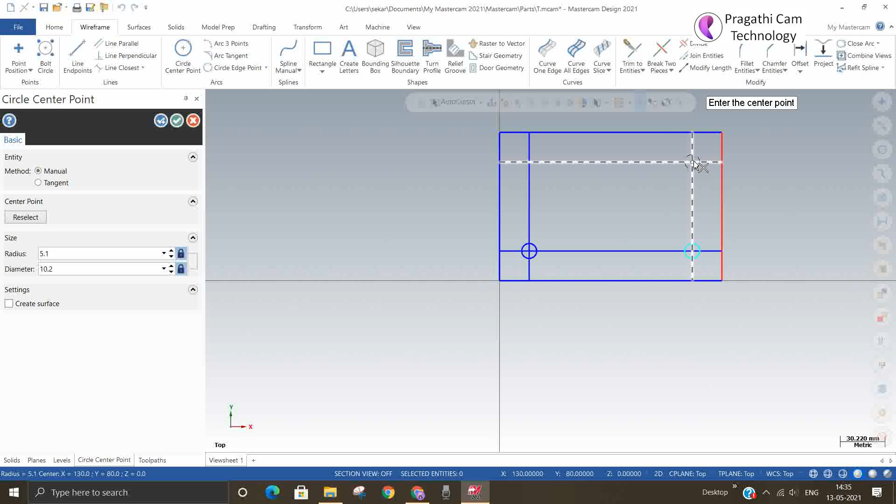Then I will put it in all the four intersections and the final intersection. Okay. Now these lines are guidelines and are not necessary. I just delete these lines.

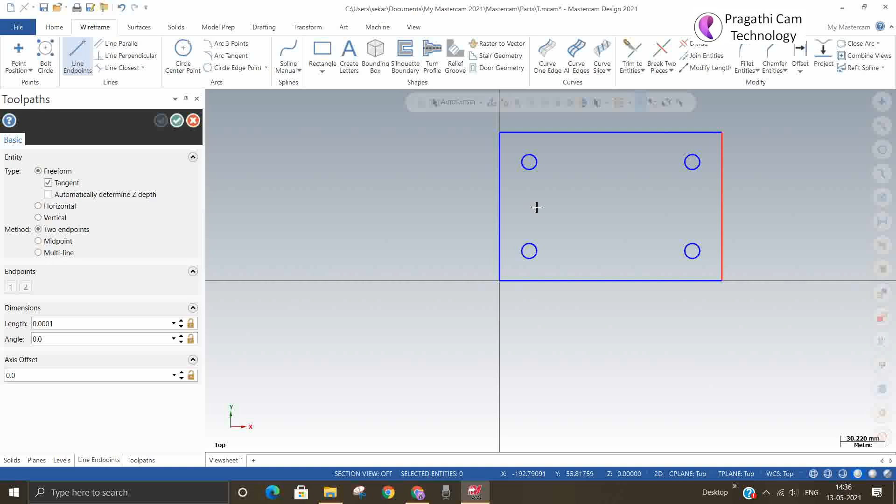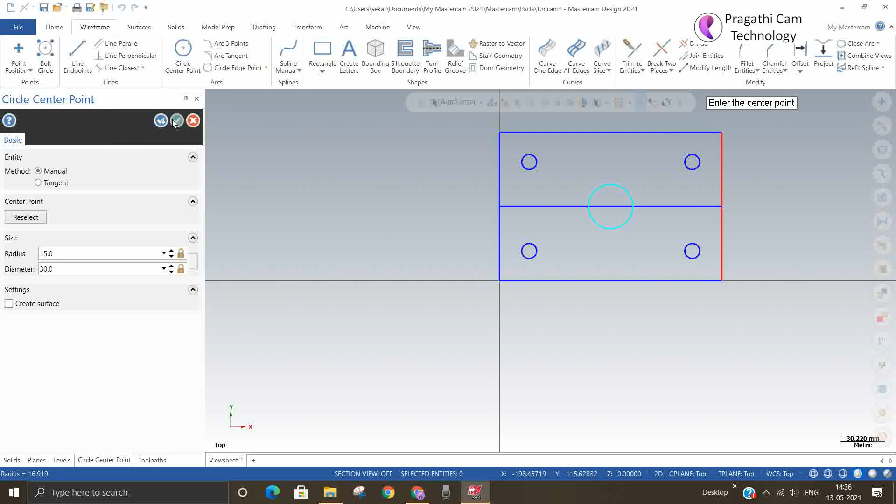So now we'll make one stock setup and machine selection. We are going to see boring also. It's better we'll put one hole at the center. So here we'll utilize the same plate for the boring also. So we'll make it 30 mm drill. Sorry, boring we are going to do. Okay, 30 mm. So this center line also I will delete it. Okay.

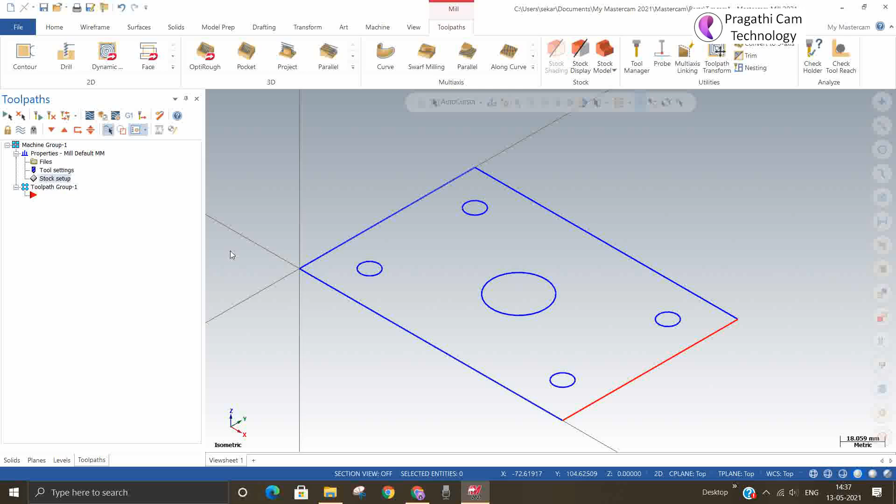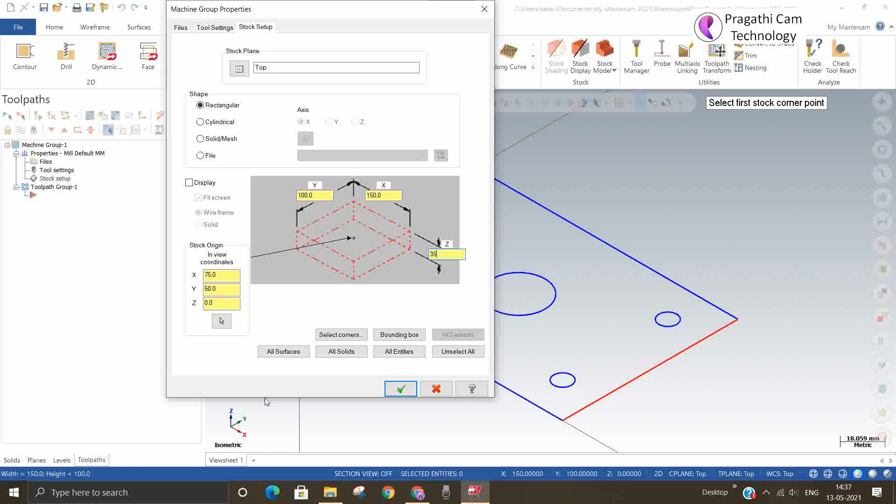Now we'll select the machine. I'll select default and the stock setup. Select from two corners. So other corner and thickness around 50 mm. Okay. Otherwise I will make it 35. So display I switch on. So you can see my stock is ready.

So now we are going to tapping. Okay. For that, what is the primary operation that needs to be done before tapping? That we will see. So the first one is the center drilling. I'll say mask on arc. Then select the window. So automatically the same size hole will select. Okay, accept.

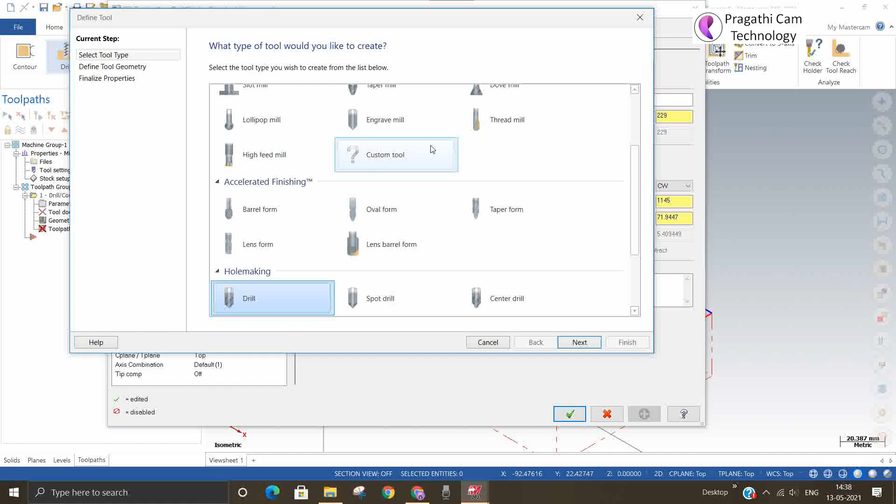So now you can go to tool, create a tool. You can access the tool from library if it is available. Otherwise, you can make it your own. So you can give what center drill is available with you, the same size. So we can accept the center drill.

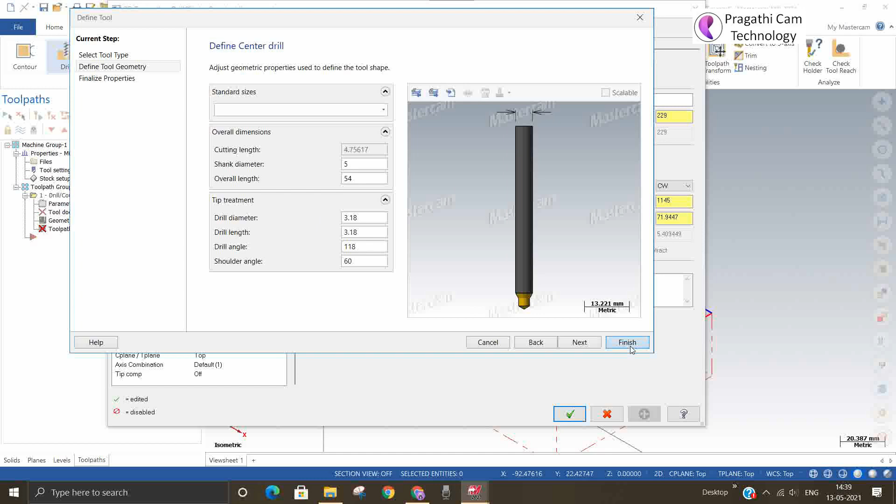The purpose of the center drill is to position the next coming drills. If you do not properly position the drill, there may be chances the drill may bend and break, or the drill may go in at an angle also. So to make the next coming drill at the exact center, for that we are doing the center drill. So I will make it 5 and say finish.

So now drill has come, then CS we can give 20, and feed rate is okay. Cut parameter, here I want only cut G81. Here linking parameter I will make it absolute, and here minus 2 I am keeping depth. Next I just switch on the coolant.

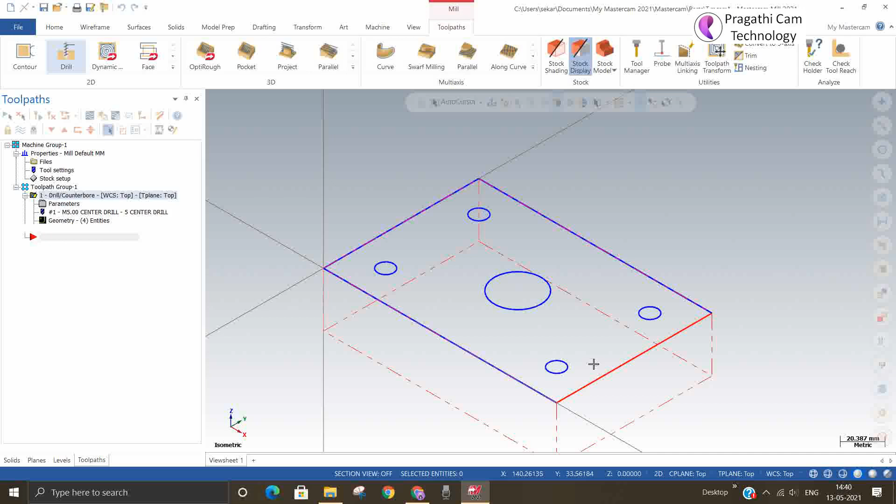So now you can see the solid verification, and let us see how this center drill happened. So now we just put a center drill on all 4 holes. For dia of 10.2, you need not go for pre-drilling. So you can directly take the 10.2 drill bit and you can drill it.

Just I am copying this and pasting it, and I'll change the drill. So I'll take new drill, filter none, and drill tools. Okay. So 10.2 drill I search. Yes, I got it, and I'll say HSS bit is available. I'll accept it. This tool number you can change it to 2.

Other parameters are okay. If you want, you can increase. Make it spindle speed 1000. Here I will make it peck drilling, and first peck 4. Okay, remaining depth I need to.

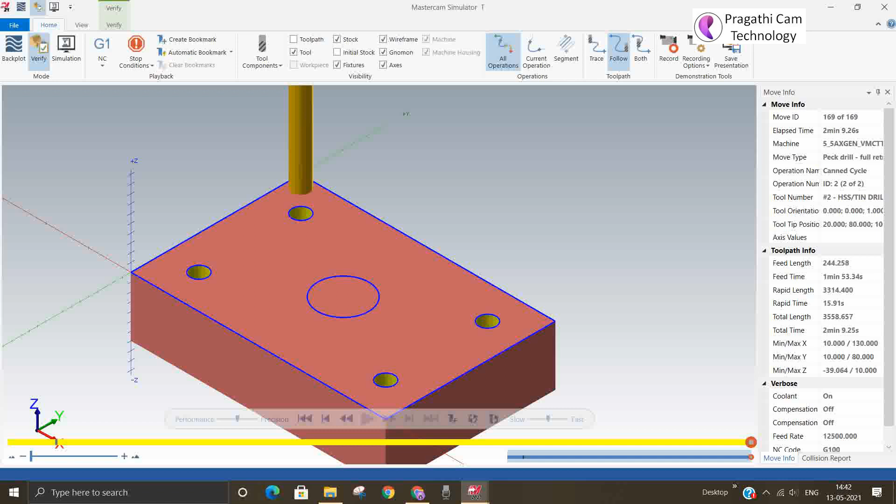So now that drilling is finished. So first that's the center bit, then the drilling is ready. Can we do tapping directly? But you should not do the direct tapping here, because for receiving the tap, the hole should have the chamfer. So that makes your tap entry in the correct direction and correct position. So there should be a chamfer at the top of the hole. Without chamfer, it's a little difficult to make the tap entry. Okay, so it is always needed to have a chamfer.

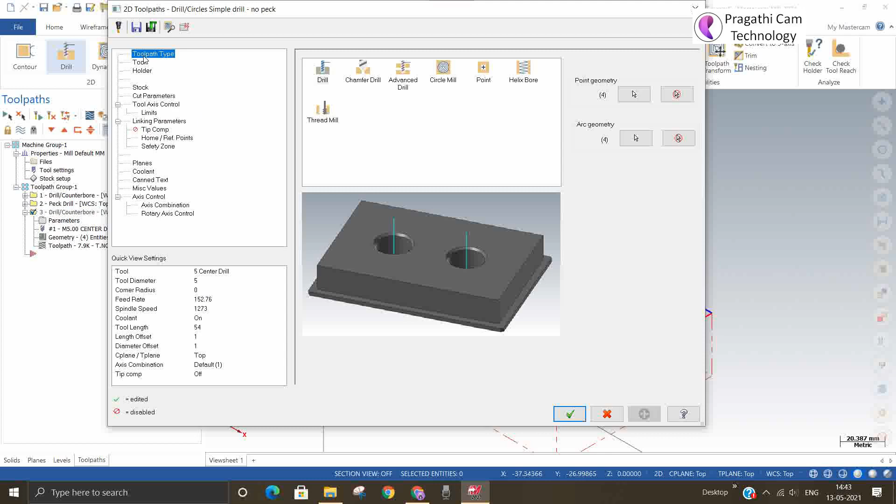I'll just copy the first operation and paste it. So now we'll take a bigger tool than the 10.2 tool. So select tool from library, filter, none, and I'll select drill tool. Okay. So 15 drill I will take. Okay. So this is tool number 3. So remaining things are okay. So let it be in the G81, Z minus 2. Okay.

So now you select all and verify. Oh, something went wrong. Maybe the edge condition of the drill was flat. Okay, so we'll recheck the shape of the tool. So it means that your drill selection was wrong. It's the wrong tool. I'll delete this. So directly I'll delete this tool. Okay, I'll add another tool. So I should have seen it properly. I missed it. Okay.

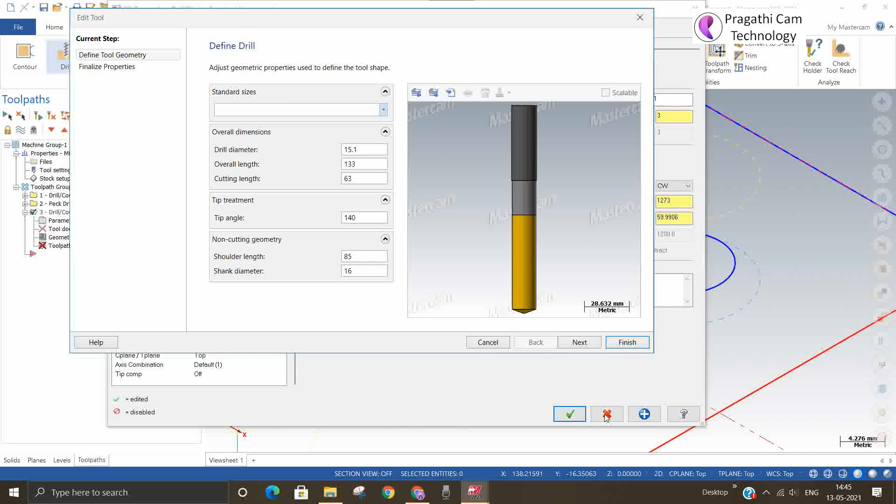So 15.1 is a solid carbide tool. I will select that tool. If you want, you can check the tip condition before going further, so no need to come back and recheck this. Okay, this is okay. So regenerate. Select all, verify. So if you want to do any tapping, minimum 3 operations you should do.

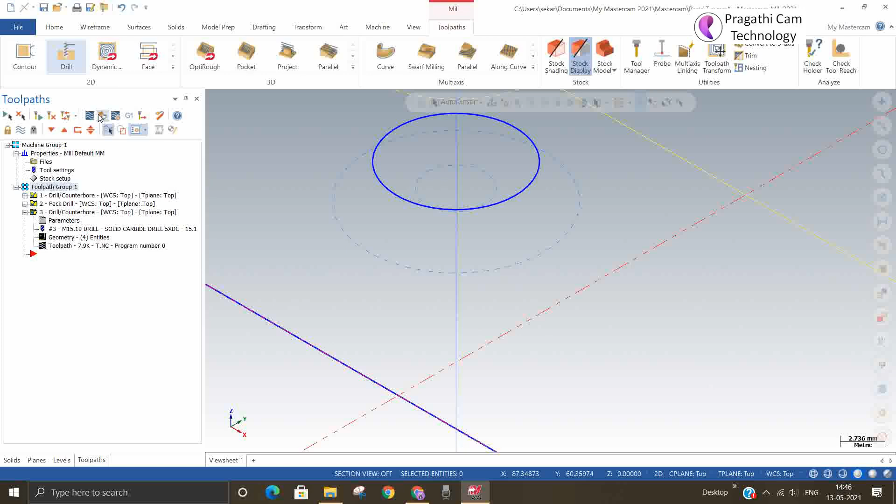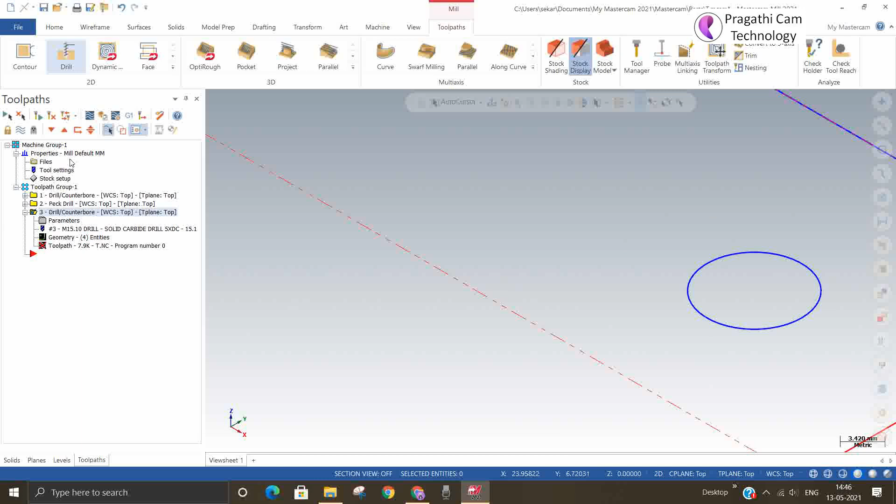So I think I need to have a little more chamfer depth. So I'll make it -3. Okay. It's a little bigger. Okay. It's better. We'll still reduce. So we'll make it -2.5. Okay. Regenerate. So these primary operations, all pre-drilling and chamfering, everything is ready now.

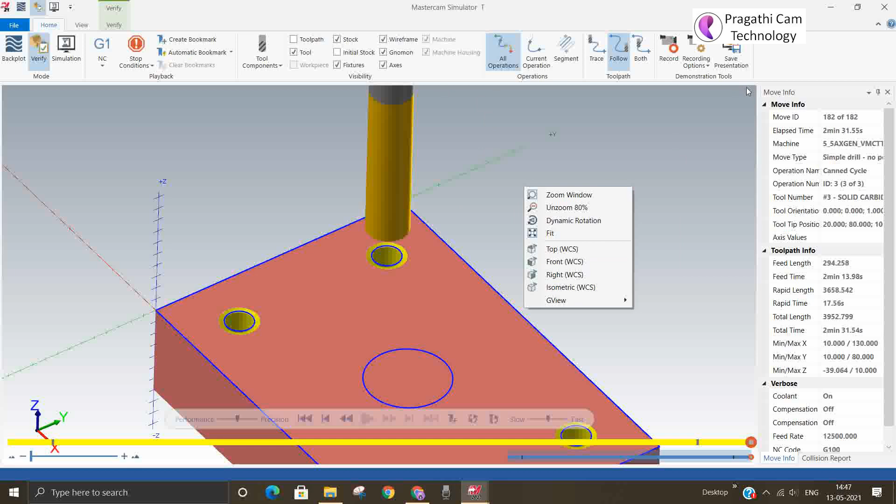The purpose of the chamfer is to receive the tap. Okay. So for any threading, any tapping, you should do all these three things: center drill, thread hole diameter drilling, then chamfering. Then only you can go for the tapping.

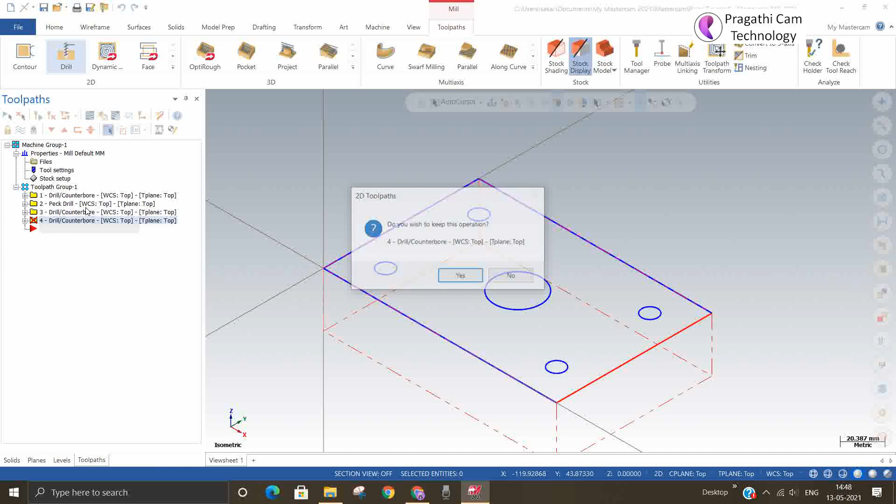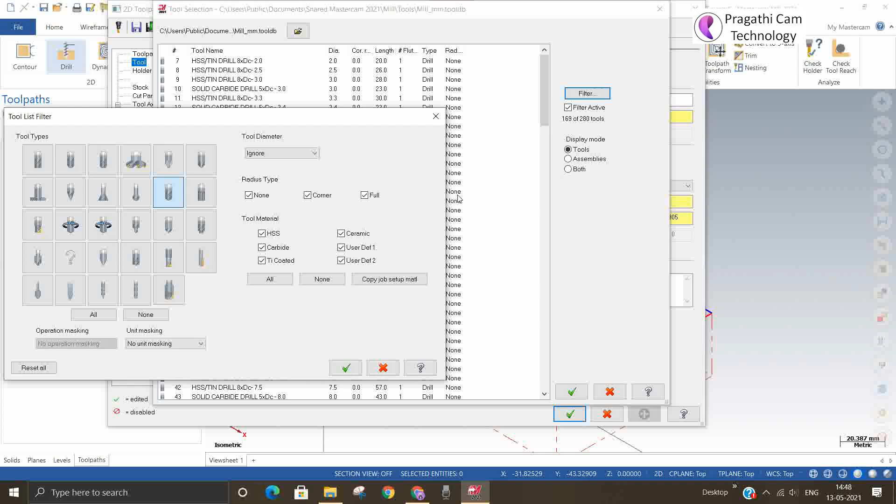Now we'll go to the toolbar. You can see last. So that option is not there, I think. Okay, we'll make it again. Mask on arc. Or I can select directly also, no problem. I need to check it. Okay. So I selected all 4 holes. Tool. Library I will go. I need a right hand tap. RH. Okay, this is the right hand.

So in almost all thread applications the right hand tap is commonly used, but sometimes in some applications the left hand thread is also used. It depends on the situation. For all general applications, all are right hand threads. So I have taken right hand thread. So now we'll see the right hand.

So we are, sorry. I think filtration is not properly done. Okay, I'll go again. Tool from library, filter, none. Yeah, I think that also on. So okay. Now M12, 1.75 is the pitch. Okay, this is my tap. Once you take it, automatically it will allow you to change your CS. So you can see that the feed per tooth automatically comes 1.75. Your feed per tooth is nothing but your pitch. Okay, so the feed rate goes around 280. Okay, spindle speed is okay. It's a minimum. So tool number you can make it 4.

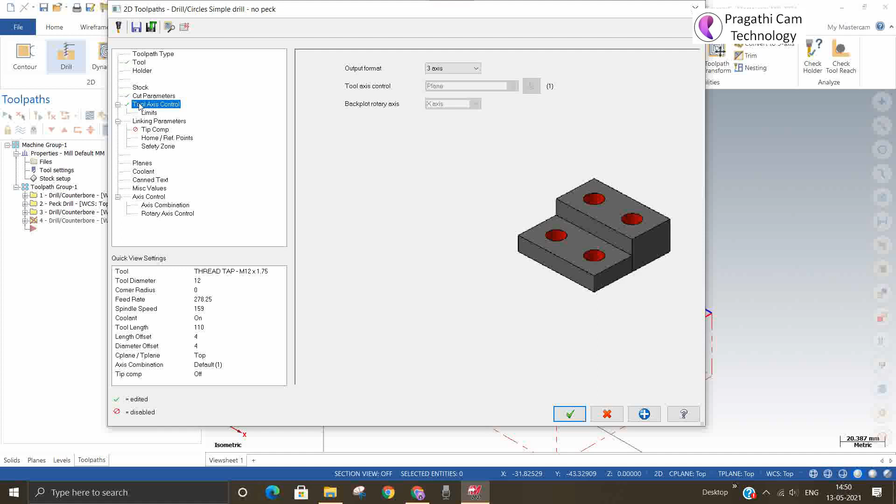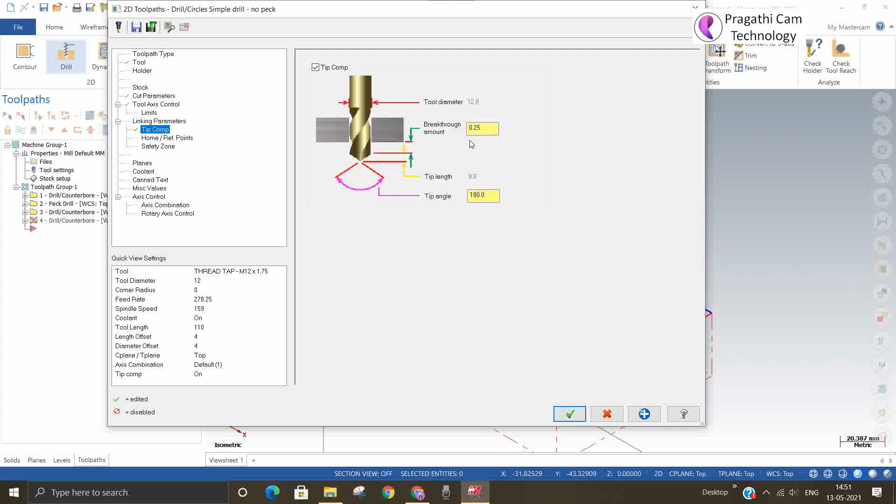Remaining thing, you can give the depth. So I will give minus 37. So I've given 2 mm more. The reason is, in the tap the starting portion of the thread is not fully formed. That's the reason you need to go a little down. Okay. So here also you can modify. You can switch on the coolant. Okay. So now you have done the threading also.

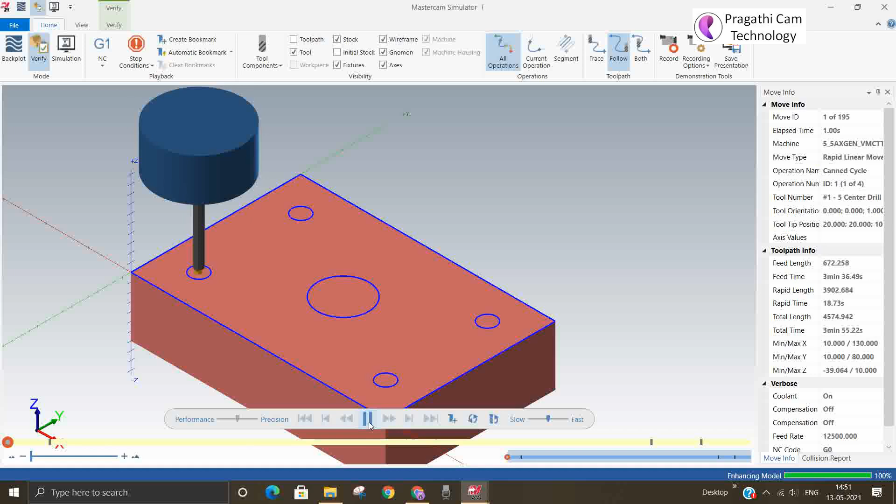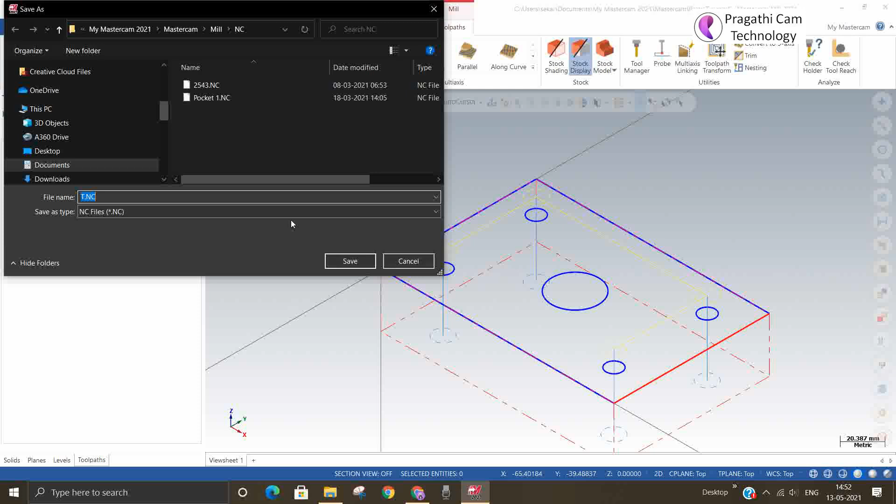So just to run it, the tap will not be visible here, but you can check it from the code. Okay. So I will select only the tap. I will generate a G code. Okay. I will give some name. Okay. So now you can see that G84 is the tapping cycle. It may differ for different machines or different controllers, but for generic Fanuc it is G84.

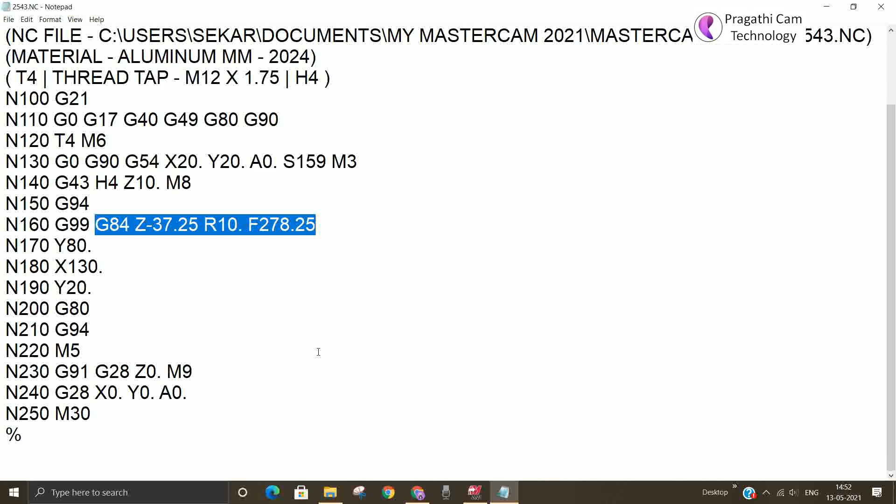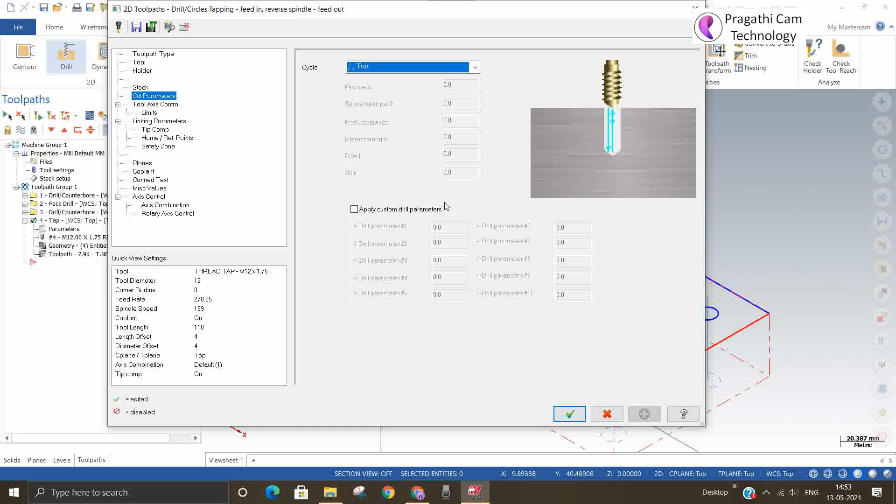Okay, this is all about the tapping cycle. There is not much you need to modify here. Only you select a tap here, and you need to select the right tap in the tool. That's all. So okay, this is all about the tap. So next, what remaining toolpath is available there, that we will see. I just deleted the thing.

So now we'll go for the boring. For boring also you need to do the centering and pre-drilling, because boring is a finishing operation. You need to get the exact size. So based on that, you need to make the pre-holes. Okay. So first we will center drill and do the pre-hole. Then we will go for the boring. So I will select the point and I select center drill.

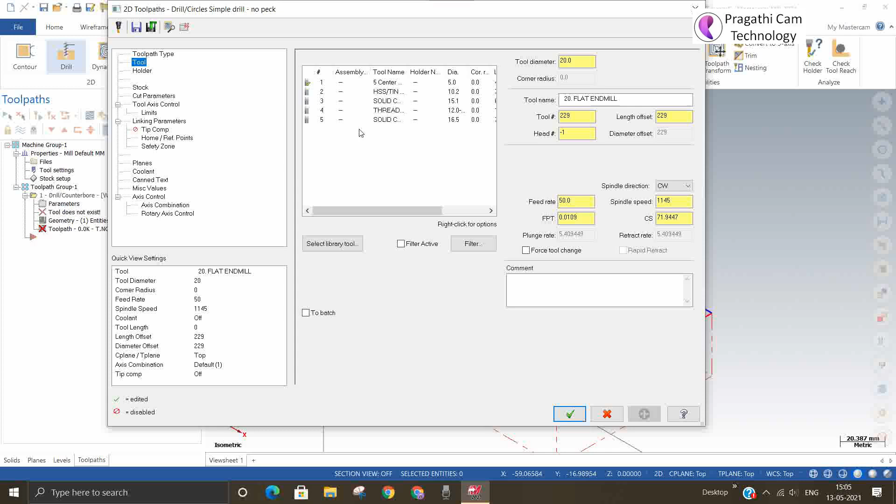Okay. Linking parameter I will give absolute, minus 2.

So now center bit we're done. Next we will copy this and paste it.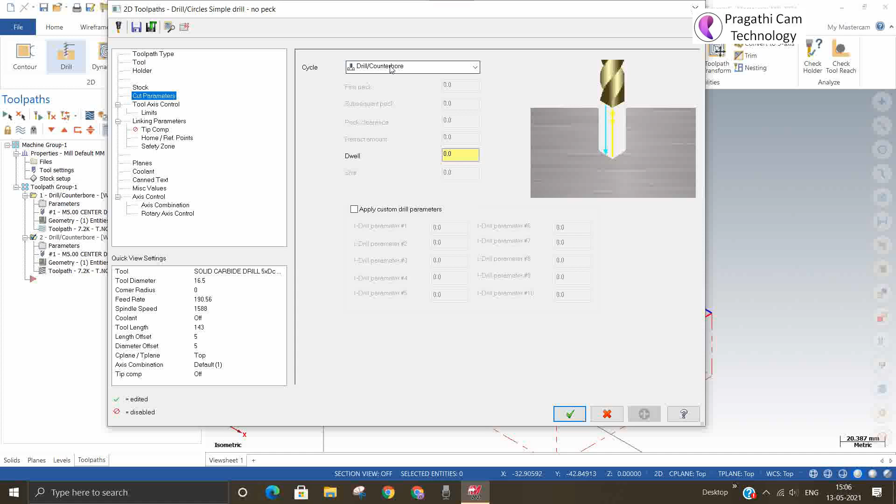Here you can change the tool. So next size I select. Here cutting parameter you change. First peck 4 mm, and in parameter depth you make it minus 35.

So here tip compensation switch on, and you can switch on the coolant. So you can regenerate it. So this drilling is over.

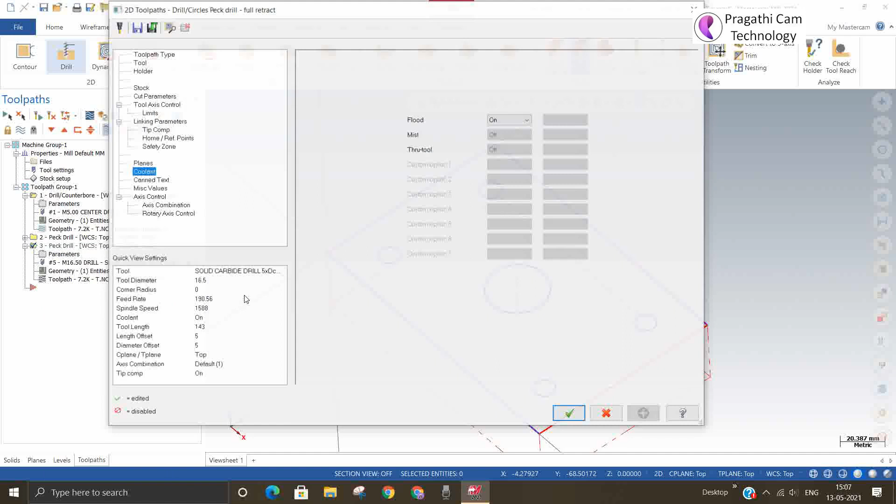So for 30 we have put only 16. So next pre-drill we can use. We'll check it.

You cannot keep more stock for boring. Boring is a finishing operation. How much less amount of material you keep, that is the best.

So now we'll select the tool, 20, 29. We are keeping 0.5 mm per side. So the tool number 6. Remaining I am not changing anything. I'll accept.

Boring is the final finishing operation. So for the 30 drill hole, we put a 29 mm drill. So what is left out is 0.5 mm material per side.

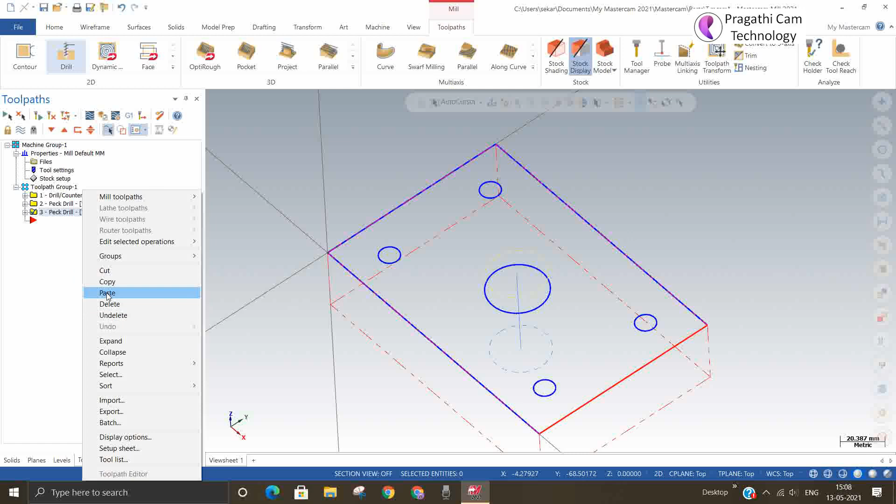You can ask me, sir, why not directly put a 30 dia tool? Why do we need boring? The reason is in drilling you cannot get the accuracy, because the drill doesn't have the capability to make the exact size. That's the reason we go for the boring operation.

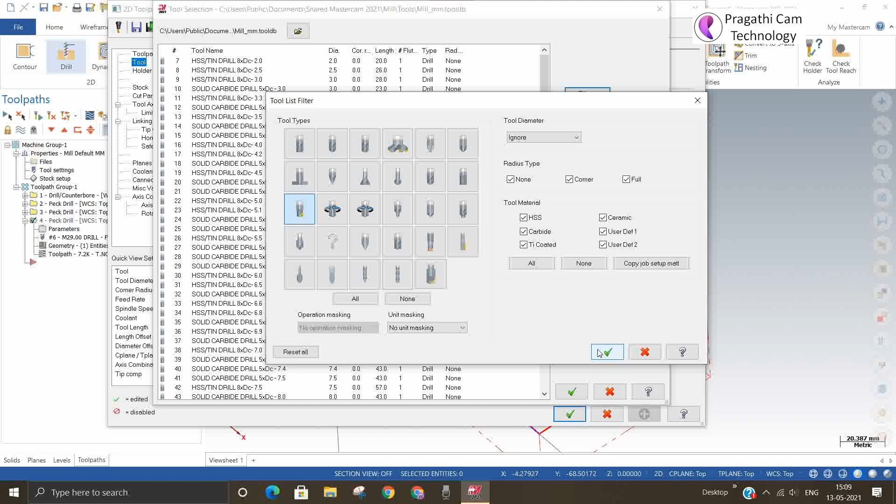So we'll go to boring now and select the boring bar. Okay, this is the boring bar. Let me see if it's available in the library. No, it is not available. I will right click and create a new tool.

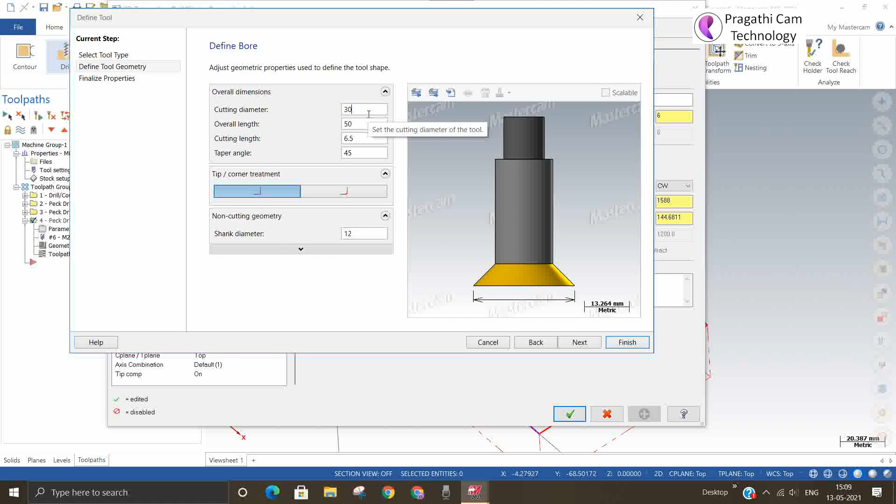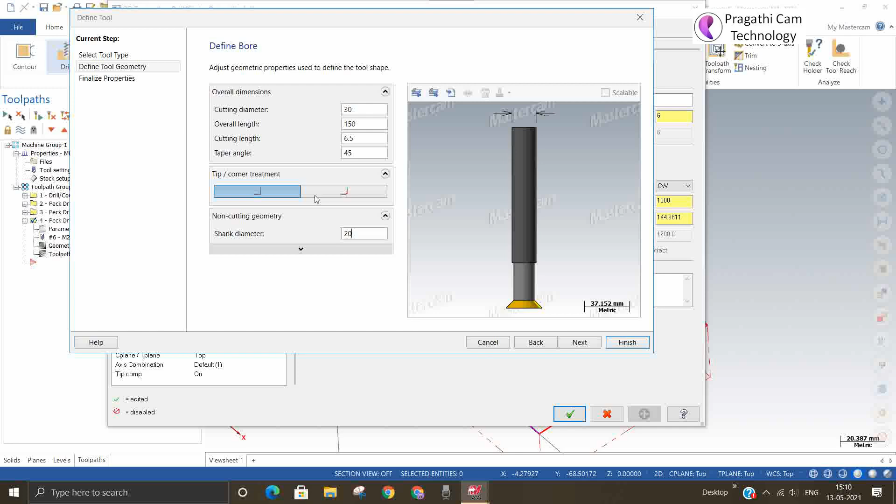So we need a boring bar. So what is our diameter? 30. Okay, you can modify the remaining parameters. Shank dia we can change. Okay, we'll finish. So now we got the 30 boring bar.

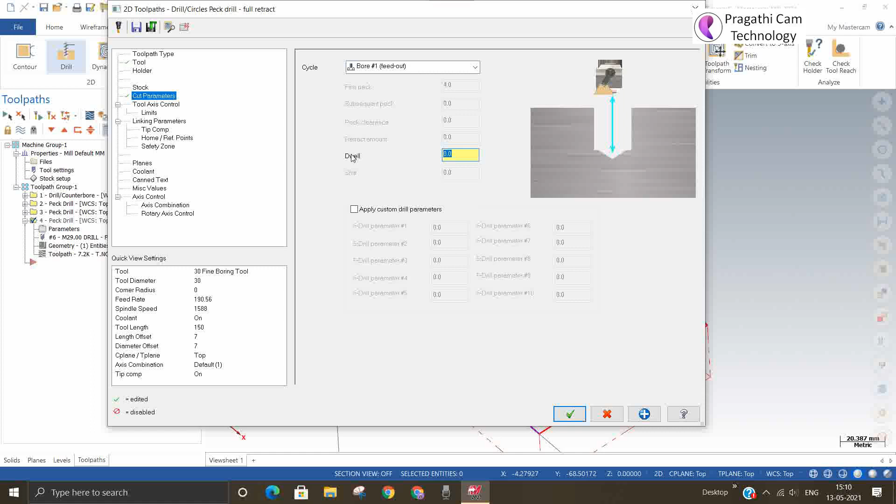Now we can go here and change it to the boring bar. Boring one we are selecting now. If you want to dwell, you can give it. I don't want now. Next I will go to linking parameter.

Remaining thing I accepted and I will say okay. So you just regenerate. So now boring is finished.

So just check it from the front view. So still we can go a little further. I will make it minus 37. So like this I will change it in all other operations also, to 37, 37.

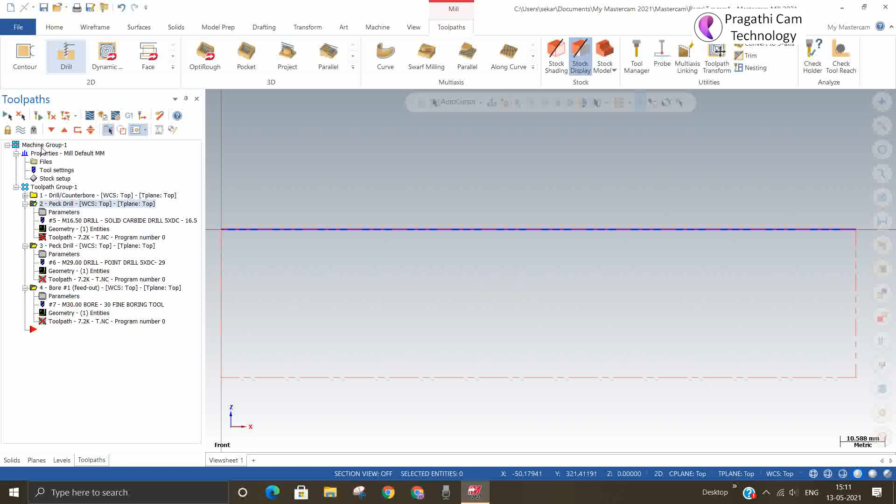It's important that you check whether it is properly reaching or not. So now it's okay. Now we can select all and verify this. This is the boring.

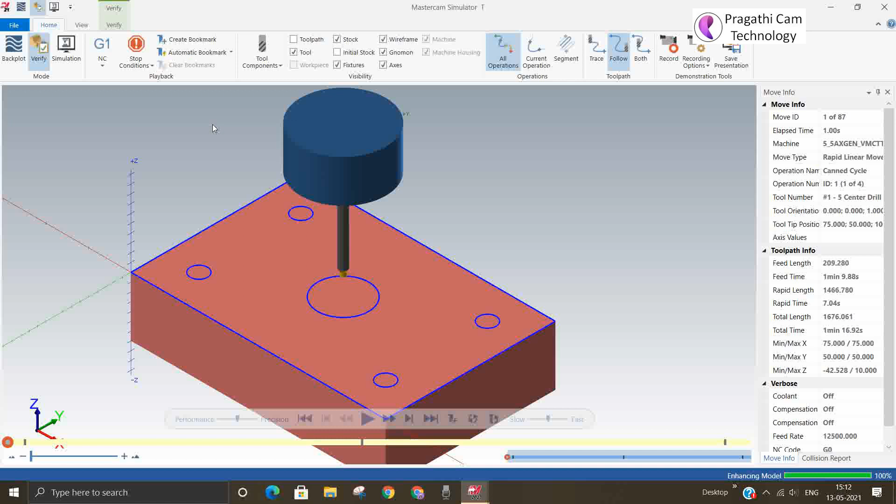Okay, so we can run it now. Run it now. So now we have done the boring. So just we will generate G code and see.

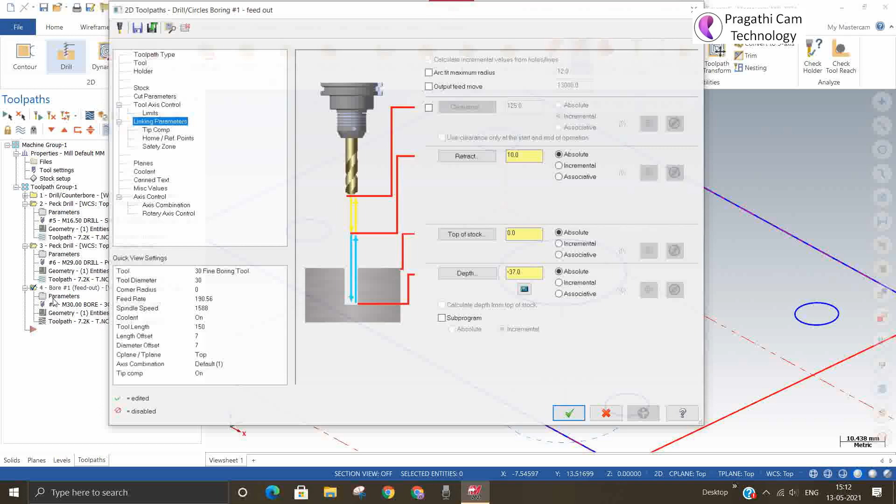It is the boring cycle G85. Now for boring there are some more methods. We see this is a bore one, that is the feed out option.

Next is the stop spindle option. We just selected the second option, regenerated, and generated the G code. So that the only thing is you will get a different cycle here. Oh okay, so here it is G86. Previously it was G85. I think so, okay, let us check it again.

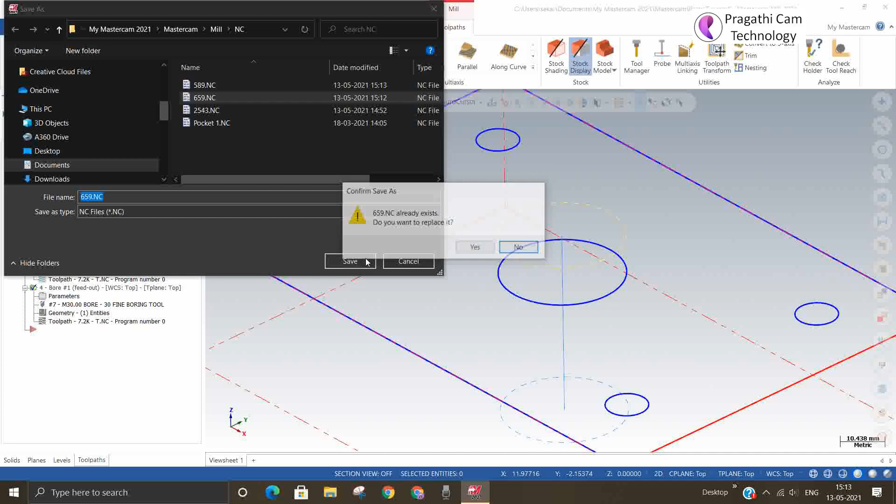So I kept the first one only. Okay, let us check whether it's G85 only. Okay, yes, it's G85 here. So in the next cycle it is G86 that is coming.

So next we will say fine boring. What is the code? So now we'll generate G code for fine boring. So this is G76. So it gives the code G76 for fine boring.

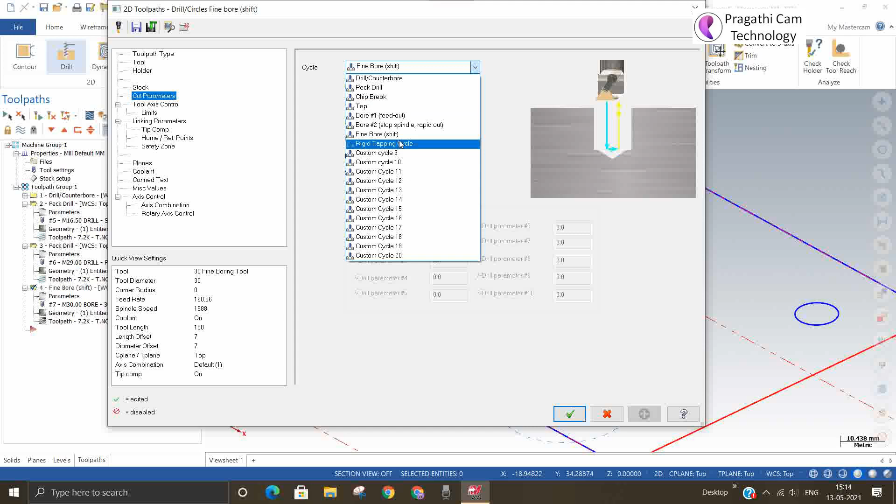So there is one more called the rigid tapping cycle. Already we have seen the tapping, so here the procedure will be the same. Now we need to understand what the code is for rigid tapping. We are not changing any tap or other thing, just going to understand what code is coming. For that reason we will change it and regenerate.

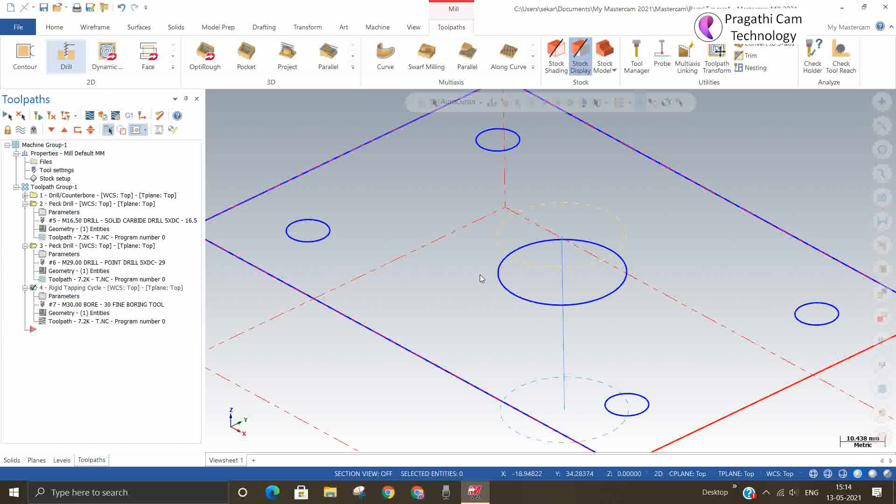It is G84 that is coming. So this is the rigid tapping cycle.

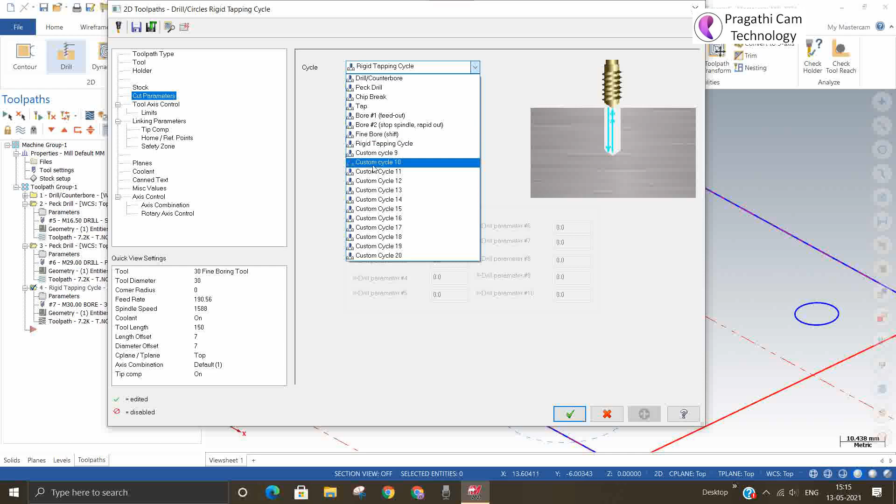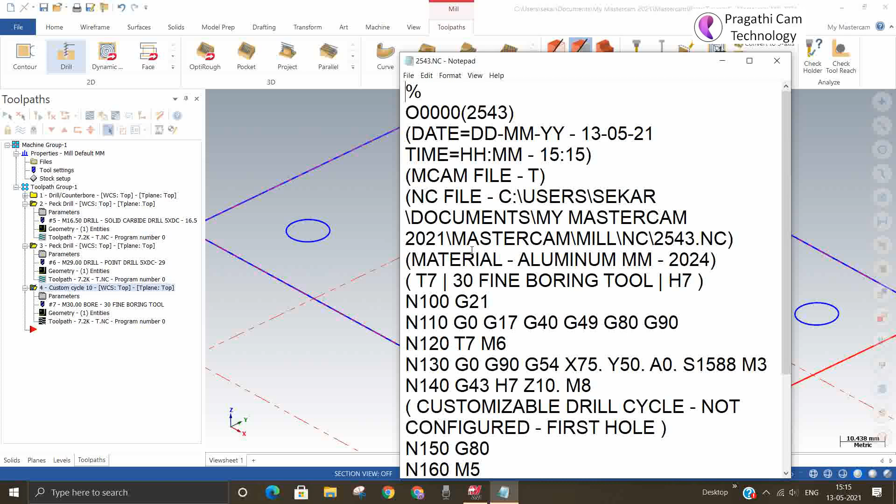Other than this, there are many cycles available. These are all custom cycles. So if it is necessary, you can customize and use this facility for making your new type of holes. It is used for customization purposes, so the post processor will be customized based on your requirement. You can see the customizable drill cycle not configured. So like this you can customize and make your desired hole.

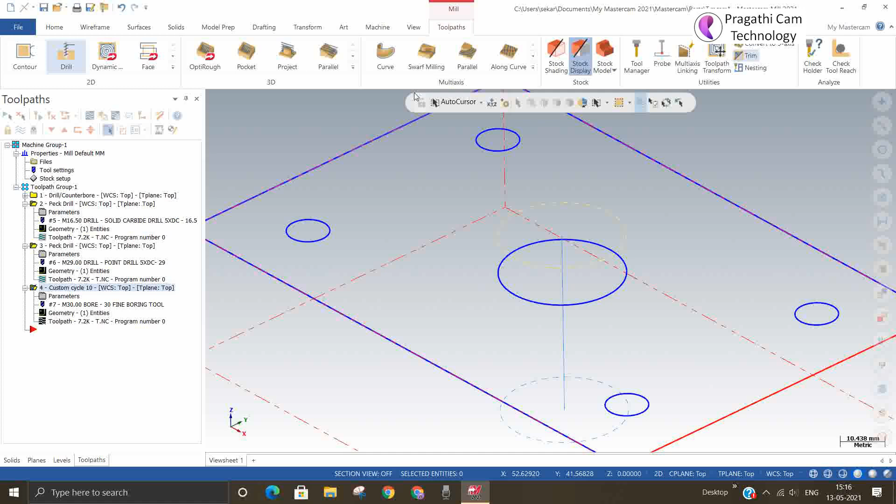So now we have seen so far tapping, and then boring and boring types. Okay, thank you.